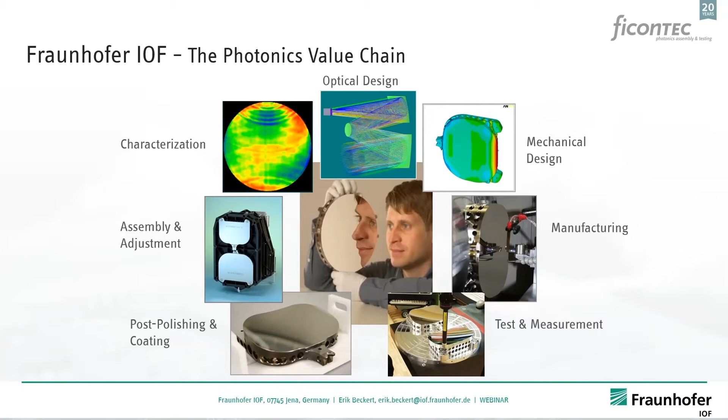I am a mechanical engineer, and I'm head of the department Opto-Mechatronical Components and Systems. We integrate and assemble small, mostly optical systems. This is where we collaborate with company ficonTEC, focusing on alignment and assembly stations. We often work in very dedicated environments such as space and aviation. We also have a side activity in additive manufacturing, printing functional materials and polymer-based optics.

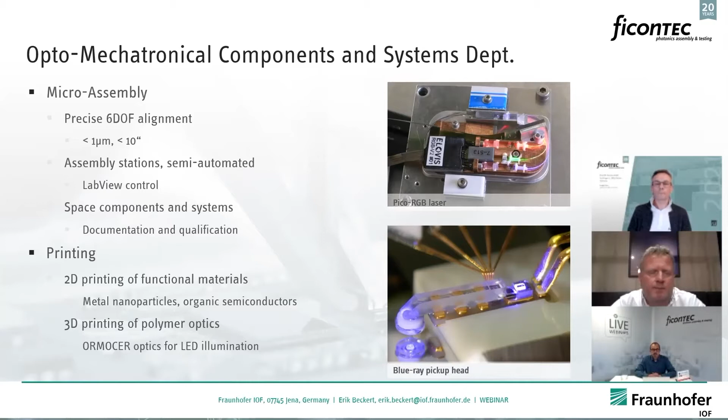We have a technology pool that covers the packaging of optics. We bond optics by means of laser-based soldering. We assemble dedicated oven-like assemblies for temperature leveling of nonlinear media. We have a quite interesting branch of CO2 manufacturing, which I will talk about in more detail.

We recently focused more and more on quantum hardware. The quantum era is just starting, and as engineers we support that by building quantum hardware, in particular complex photon source payloads for satellites, quantum computer components, and so on. So that's a potpourri of what our institute and department do.

Quick question, Erik - is the quantum aspect of your role at Fraunhofer IOF relatively new, or has it been growing for some time? I'm happy to say I started this activity at the institute about 6 years ago, building a specific entangled photon source for the European Space Agency. We started with 3 people 6 years ago, and now the branch overall, not just my department, is something like 50 to 60 people. That's a huge growth in this area.

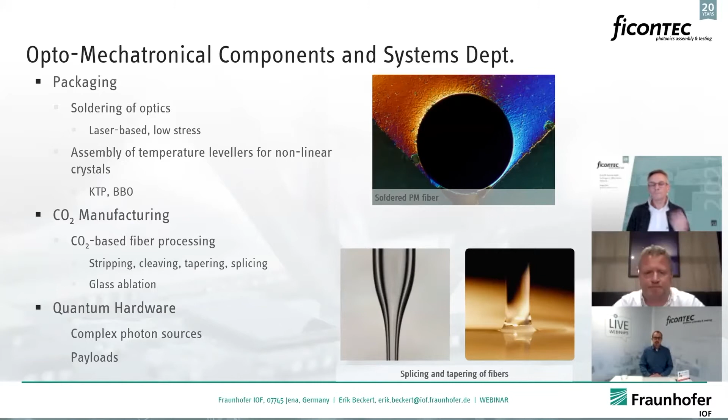Let's go to the next slide. What I want to talk about in detail now is fiber preparation using a laser, specifically a CO2 laser. The CO2 laser is quite a versatile tool since you can do a lot with it, particularly with respect to fiber preparation. You see various examples here.

Let's go from right to left. We can splice or weld fibers to other things. We can taper fibers using the laser, changing the diameter. We can clean facets with the laser. We can polish or create ball lenses at the end of the fiber. We can cut or cleave fibers. We can remove the jacket or coating from the fiber, and we can also collapse, for instance, photonic crystal fibers. So basically all necessary processes required to prepare fibers before they are assembled into the system can be done by one single laser source, the CO2 laser.

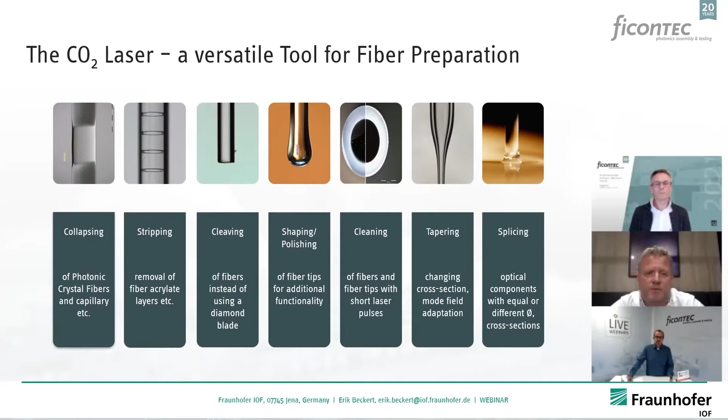This is what I'd like to show you in the following slides through some examples. Why is the CO2 laser a versatile tool? The reason is the 10 micron wavelength of the CO2 laser interacts with a lot of matter, and in particular has strong absorption in transparent components, especially glass-like components like a glass fiber.

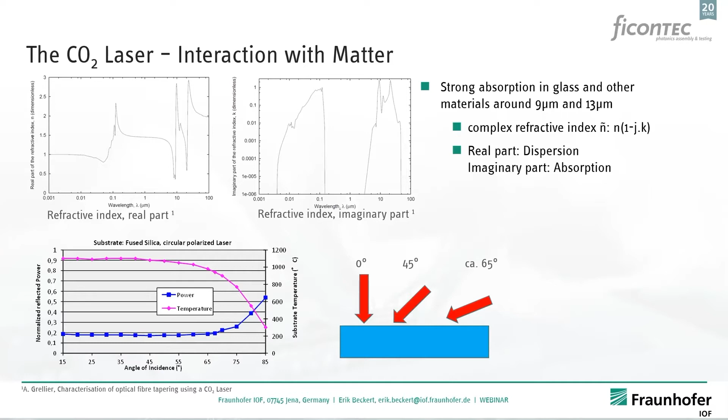You can investigate that scientifically through the refractive index of media - the real part is the dispersion, and the imaginary part is the absorption. You'll find that for typical glasses, there's strong absorption in the 10 micron wavelength range, which is actually the range where the CO2 laser operates.

You can even check that with polarization of the CO2 laser, you have strong absorption even at quite high angles of incidence. This is shown in the lower graph where the reflected power, or the temperature generated by the absorbed power, is plotted. You see that even up to inclination angles of 60 to 70 degrees, there is still enough power absorbed in transparent objects.

This results in a significant increase of temperature in the transparent material, and we use this energy to melt glass or transparent media, or to ablate material from these media. So absorption of the CO2 laser is the basic functional principle we use here. The CO2 laser is one of the longest-standing laser tools around, and it's quite cheap, yet it still makes great use particularly for glass manufacturing.

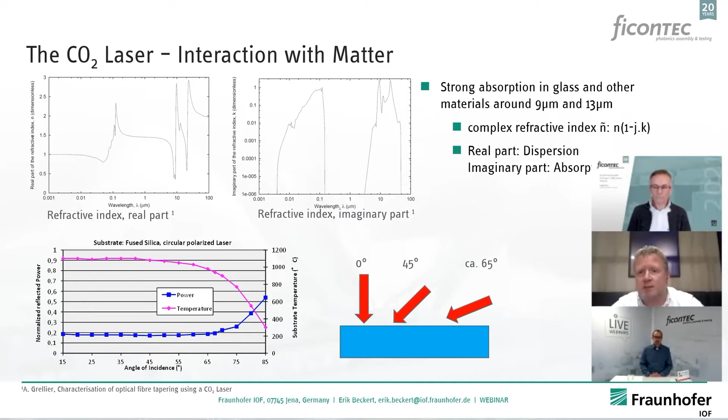Cool, thank you. Let's go to the next slide. Now that we know CO2 radiation is absorbed at the surface of transparent components, I'd like to show you some examples of what we do with the CO2 laser.

We start here with fiber stripping and cleaving—very important processes in automated fiber preparation for assembly lines, since fibers have to be prepared, stripped, and cleaved before they can be put into V-grooves or in front of any type of emitter. This is exactly what we do with the CO2 laser.

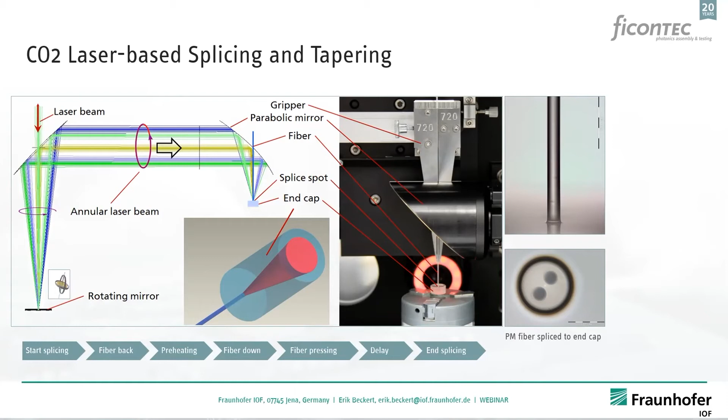If we go to the next slide, we can see that this is not only used for attaching a fiber to an end cap, like shown on the picture on the top, but it is also used to simply melt a fiber and change the diameter of the fiber by means of pulling it on the two ends and creating the so-called taper, which is basically a change of the diameter of the fiber. This is used to adapt mode fields in fibers or to adapt the fiber diameter to emitter sizes, things like that.

The nice thing for the CO2 laser is that you can really process a broad variability of geometries. You see fibers or even capillaries, so tubes of glass, ranging from single mode fibers to even 2 millimeters in diameter can be processed, and we can create tapers in length up to 90, 100 millimeters, something like that. We can process single mode fibers, multi-mode fibers, photonic crystal fibers, and so on.

So with the CO2 laser, you can process a broad variability of fiber types, which is difficult to do with traditional equipment, since the traditional equipment is most of the time either suitable only for single modes or only for small diameters and so on. What sort of input powers for the CO2 laser are we looking at for the different processes here? Yeah, we typically use CO2 lasers here for these things in the range of less than 100 watts.

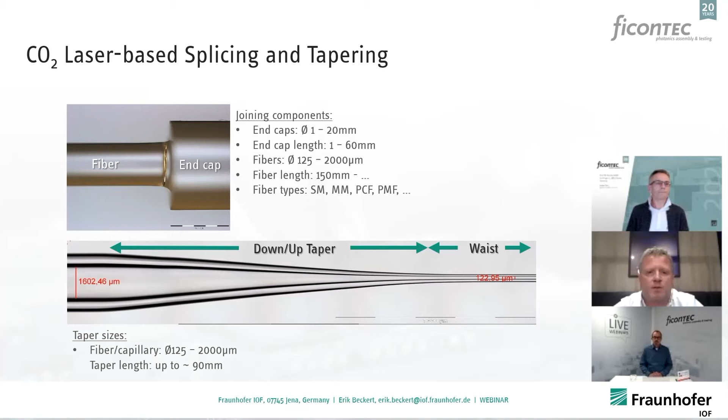I think there was a question by Friedel about something. There was indeed, let me read it out to you. Friedel Bachmann - hi Friedel, how are you doing?

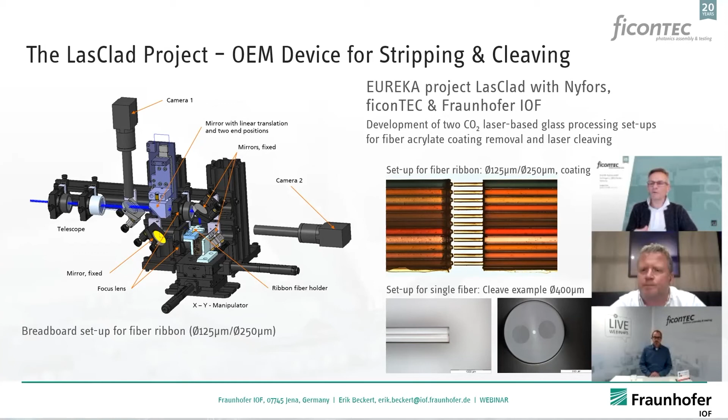How long did the project run for? It finished about a year or 18 months ago - it was a 3 year project and it finished something like half a year ago, I think.

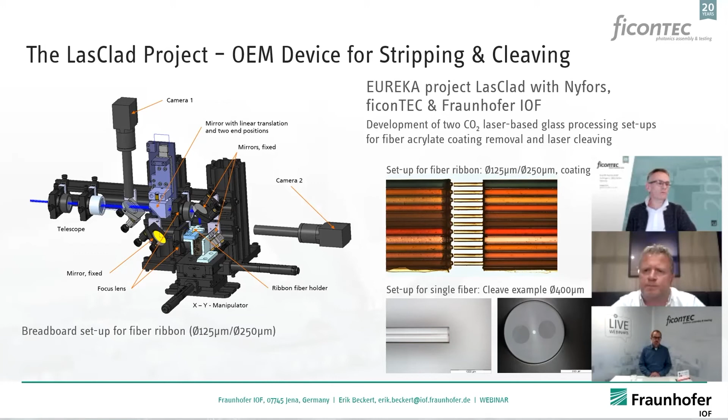So we have a short video, and some people may have already found this on our website. Kevin, we can roll action please on the next slide.

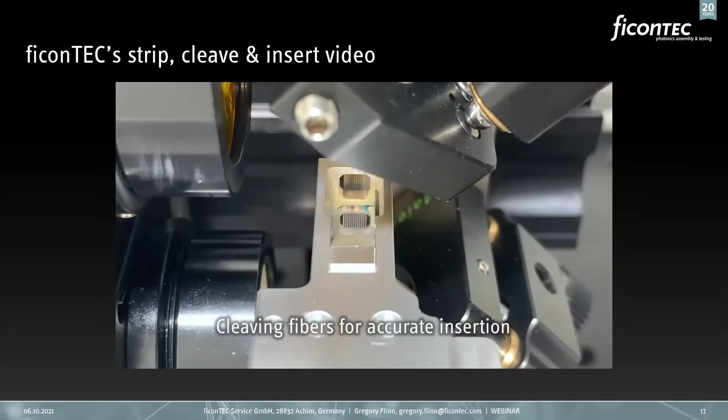And what we demonstrate here are two separate processes. There's the strip and cleave aspect - a strip and cleave process using a CO2 laser on a fiber ribbon. I think it was a 16 fiber ribbon - 16, channel. I need to improve my counting.

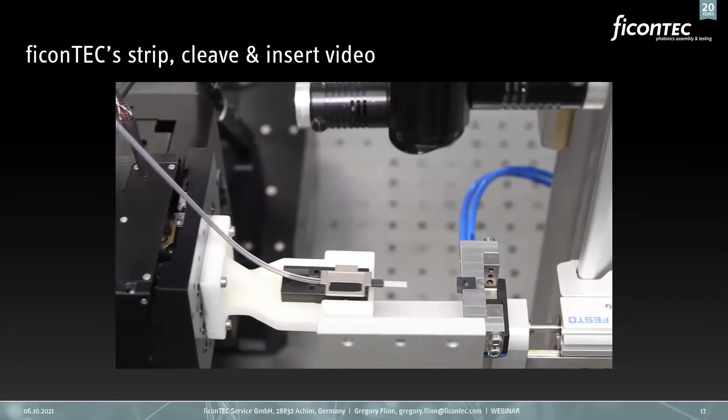And then there's a second, still very separate step at the moment, though we're looking at maybe bringing it together: insertion into a module, into a fiber connector. There we are actually quite agnostic as to which connectors we can address. So what we did in the second section of the video is inserting the prepared fiber ribbon into an empty MPO connector. The next step then will be filling it with epoxy and curing it in an oven.

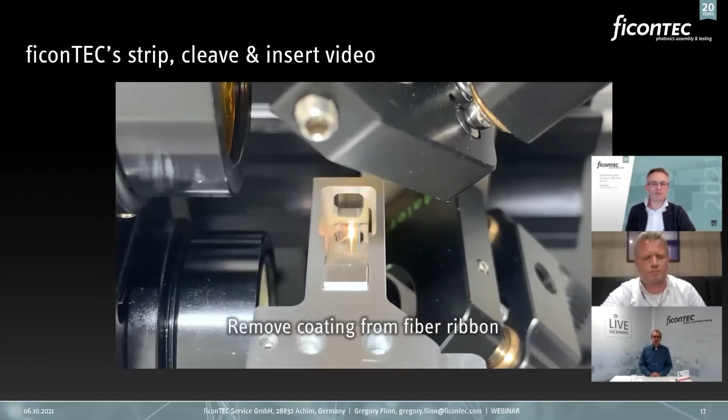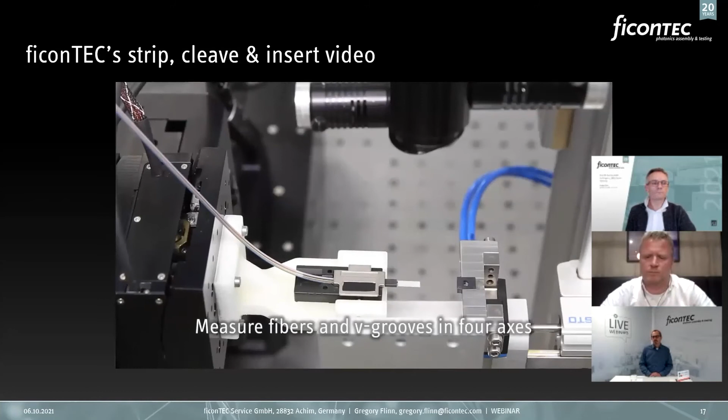I believe I spoke to Moritz some time ago, and I believe they have also successfully done this with a two-tier connector - two ribbons into the same connector. That's right, we also did it now with a two-tier connector, meaning we have two lines of fibers. And this also demonstrates that this can be automated.

And what happens to those fiber tips that now poke out at the end of the connector? What would be the normal step here that we might also apply in a fiber preparation concept system? They would be cleaved again - after curing it in an oven, they will be cleaved and polished.

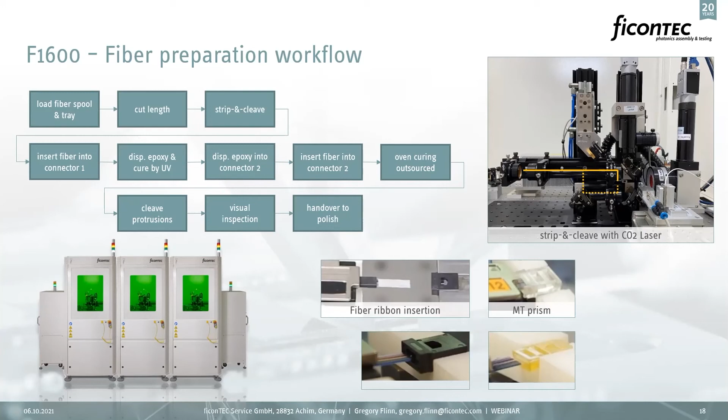Currently we do have the strip and cleave as a laser process, and then we have the cut length as a laser process - those were the main laser processes. After that, we prepare that the fiber will be placed in a V-groove, or it can be placed into an MPO connector or whatever - it's really depending on the customer needs.

So I believe we've had some interest from different people. We can't obviously talk about customer processes and requirements, but can we talk a little bit about what we are doing in this direction already? There was at least one topic that came up in our discussions.

So what we currently are doing is separating these inline processes into individual process steps. The most upcoming concern from fiber producers or fiber preparation companies is going from manual processing into automated processing. We are currently demonstrating that this is possible, for individual processes, to release a little bit the concerns from customers. That means we are developing an R&D system where you can batch-wise automate these process steps, to demonstrate that automation is the next task coming up soon.

Next generation. And another aspect, I believe, is for co-packaging and maybe some LiDAR applications - we're actually doing some work there. Can you tell us a little bit about that?

What we are doing there, especially for co-packaging, is placing fiber ribbons into V-grooves, placing a lid on top of it, and curing it. Typically these steps are done manually currently, and this can now be automated. Most of these steps are passive steps because the accuracy is given by nature from the V-groove. The only thing we can actively check is the outcoming result, whether the placement was good or not.

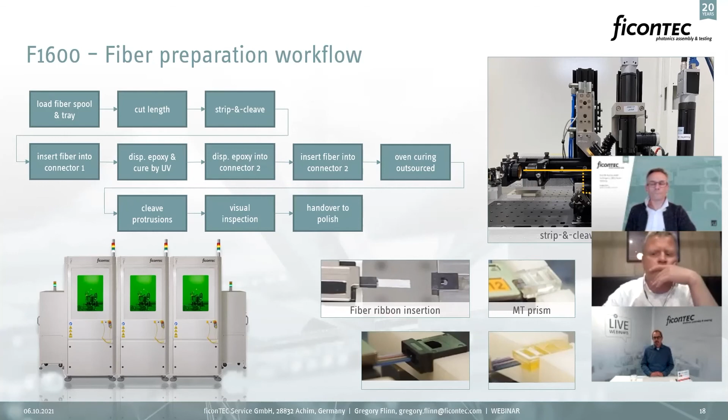Okay, thank you. If we go on to the next slide, there were a couple of other topics that came up in our discussions as we were preparing for this video. Something you mentioned, Anna, and that you've touched upon, Eric, as well in your slides, is the requirement for cleanliness and intermediate cleaning steps during the series of process steps.

Yes, I guess we're looking at removing remaining ablation material, making sure the cleaved ends are clean. Exactly - if you cleave the fiber, if you remove the coating from the fibers, you can have some residues on the fibers, and it's very important that they are very clean before placing them into V-grooves. As I already mentioned, the accuracy is given by nature from the V-groove design, and if you have some residues, then you don't place the fiber in the V-groove correctly, and the result is not as good as expected. And given the wavelength nature of light, if the size of that debris is half a micron, you're already missing your target.

Some customers have requests to create artificial ribbons. In all these projects we've talked about ribbon fibers or fiber ribbons. What else can be done is you have a fiber spool, a fiber coil, where you spool the fiber, then cut it into length, cleave it, and create your own artificial fiber ribbons. This is also possible.